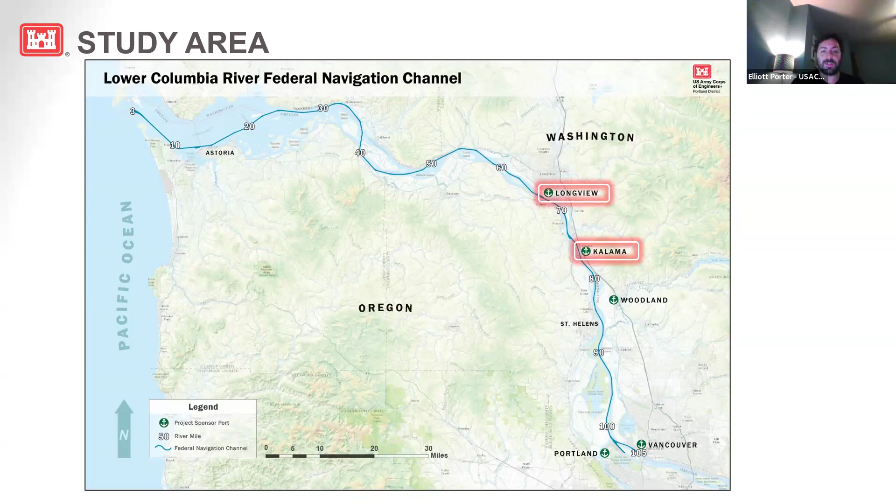So the area that we're looking at are at the ports of Kalama and Longview. It's about 2/3 of the way up to Portland and Vancouver on the Columbia River. These were areas that were considered in the previous channel deepening project, and we have been specifically asked to look at improvements or additional turning basins within this reach. Next slide.

So the reason why we look at this and the reason why the Columbia Snake River system is important is that it is a vital means of commerce for the region. It moves a lot of cargo, primarily exports of farm products out of the Columbia River and into the Pacific Rim. The lower Columbia River is #1 for U.S. wheat exports, #2 in soy and corn exports, and #3 globally in grain exports. It's also the #1 West Coast port for forest and mineral bulk exports.

In 1999, the Corps of Engineers was authorized to deepen the existing Columbia River Federal Navigation Channel from 40 to 43 feet. Since then, the ports have invested an additional $1 billion in infrastructure, which has led to increased utilization, the ability for larger ships and larger volumes of material to go out. And so we're taking a relook in terms of the system needs to meet not just our current but our future demand. Next slide.

So the current problems that we've identified within the study area is that the existing federal turning basins are overutilized. They're insufficient. The ships, since the channel deepening, have gotten larger. They're deeper drafting. And this has resulted in congestion, increased use of tugs, and tidal delays. We also see frequent shoaling and low water at the Port of Kalama. They currently maintain an area in front of the Temco grain terminal. In the late summer, coinciding with low water, we also see shoaling in that area, which results in decreased depth.

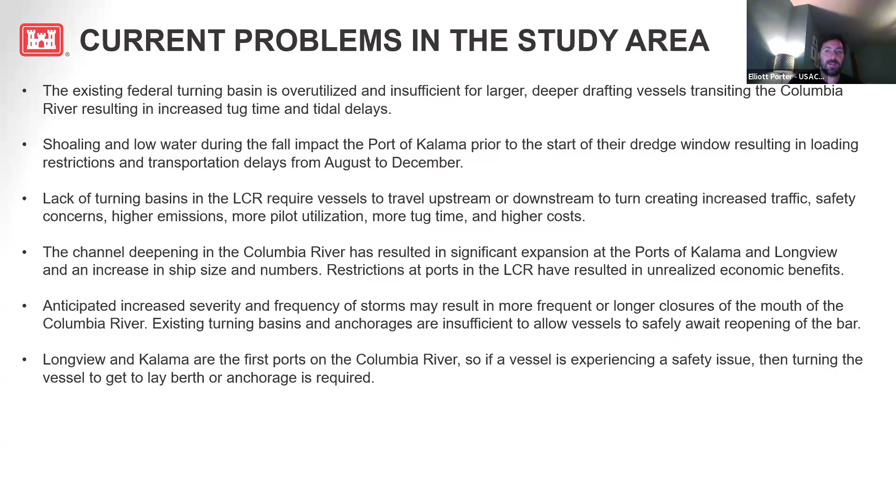So the objectives for this study are looking at ways to improve the utilization of our existing facilities to maximize capacity within the system. We're looking to improve the efficiency of vessel loading, reduce tidal restrictions, and maximize our transportation cost savings by getting vessels on and off the berth more quickly. As I mentioned before, where we see insufficient depth at these turning basins, or we see shoaling during periods of low water, it results in queuing and increased transit and turning times.

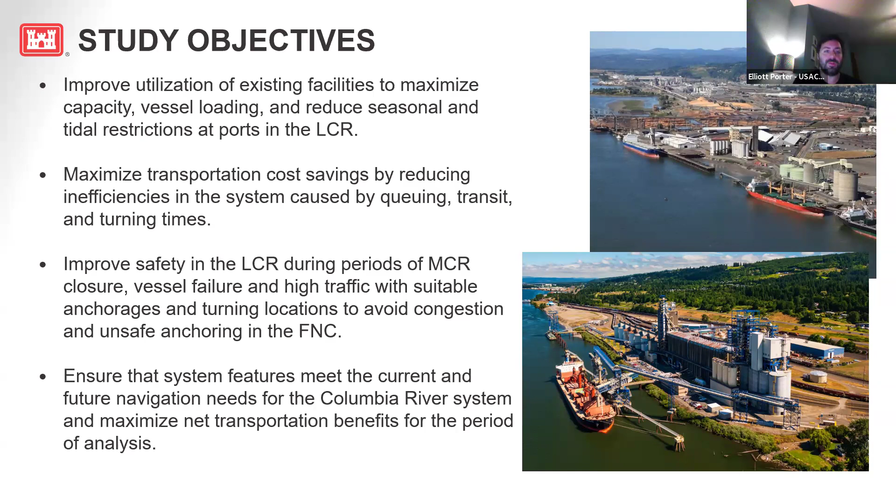Overall, we're looking for opportunities to improve safety in the lower Columbia River, but especially during periods of closure at the mouth when vessels cannot come in or go out of the system. And then we're looking not just at today and what today's needs are, but over a 50-year planning timeline to understand what the future needs of the system might be. Next slide.

So when we started this project, we looked at a whole range of issues, even more than what we're showing here, but these were the primary ones. What you're seeing in bold are the ones that we considered implementable and measures that would achieve our objectives. Based on the congressional authority that we got for this study, we're specifically focused on improvements or establishment of new and existing turning basins. And so any project or any recommendation that we looked at included consideration of modifications of the existing turning basin at Longview or establishment of a new turning basin at Lower Martin Bar, which is at the Port of Kalama. Additionally, we looked at adding stern anchor buoys, which are areas for vessels to anchor.

We looked specifically at fully laden vessels that require the full 43-foot draft so that we have additional areas to place them outside of the channel to decrease congestion and improve safety. And then we also looked at sediment catchments, which are overdredging areas that catch sediment before they begin to impact our navigation features. And so those were the four that we carried forward.

We looked at some other primarily maintenance reducing alternatives like pile dikes, perpendicular dikes, and maintenance in other areas of the river to reduce the volume of material that was impacting the turning basins. They were eliminated for various reasons, primarily because the cost associated with them was beyond the benefits that we could hope to achieve. Next slide.

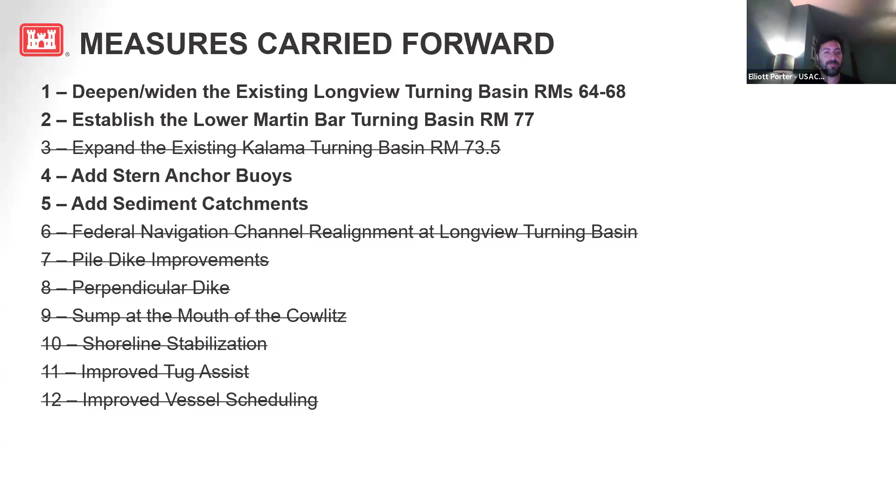So we took those handful of measures and we formed them into alternatives. We looked first at the Longview turning basin by itself, and this is improvements to an existing federal turning basin. Our second alternative was looking at establishing a new turning basin at Lower Martin Bar. We considered them individually to make sure that they were economically justified on their own, and then we combined them together and ensured that they were economically justified together.

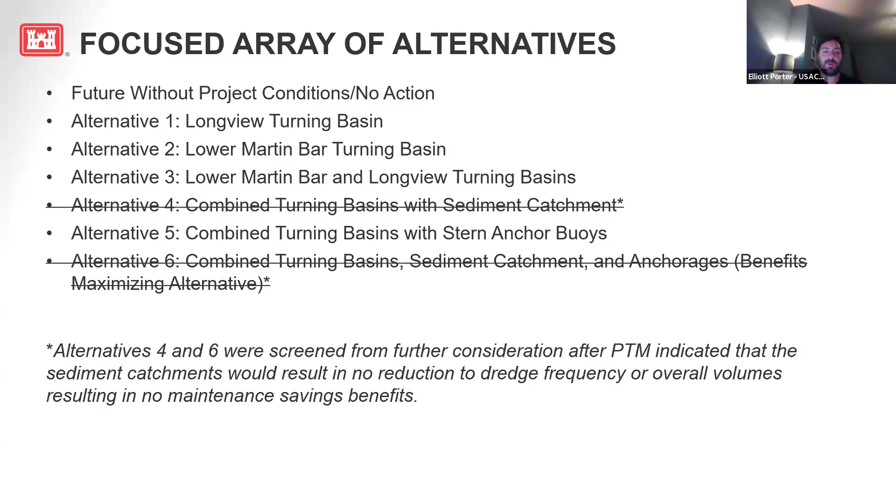And then finally, we looked at the combined turning basin with stern anchor buoys for additional places to anchor those vessels. We did have two additional alternatives that were eliminated upon further analysis. Both of them included the sediment catchment. The idea with the sediment catchment is that you overdredge an area and you reduce the frequency and/or the volume of material that needs to be dredged on an annual basis. During our analysis, we determined that it would not decrease the overall annual volumes or the frequency that we would need to dredge. So it was just additional cost without any additional benefit. Next slide.

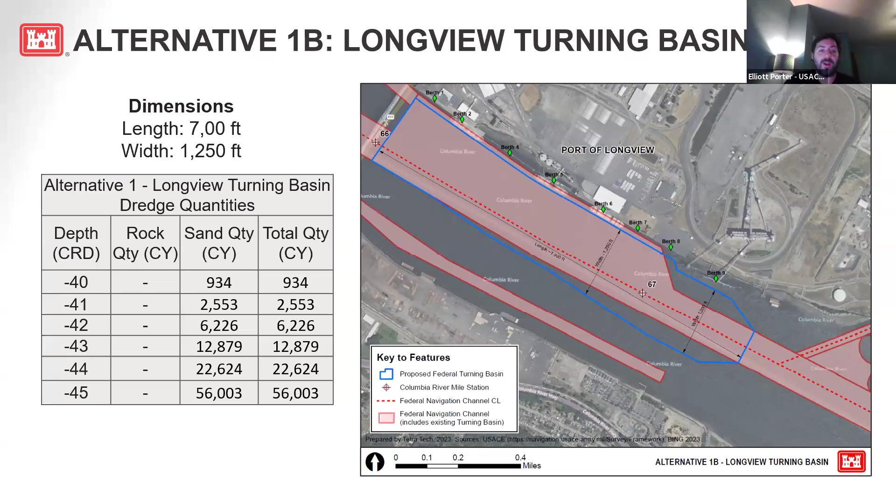And when you look in comparison to the previous slide, the dredge quantities do not increase significantly. As we move into the existing turning basin, a lot of that naturally exists deeper than the 40 feet that we're authorized to dredge to. And so what we see is very limited additional dredging required to expand that turning basin across the full footprint. Next slide.

So the next alternative is consideration of a new turning basin, a new federal turning basin at Lower Martin Bar.

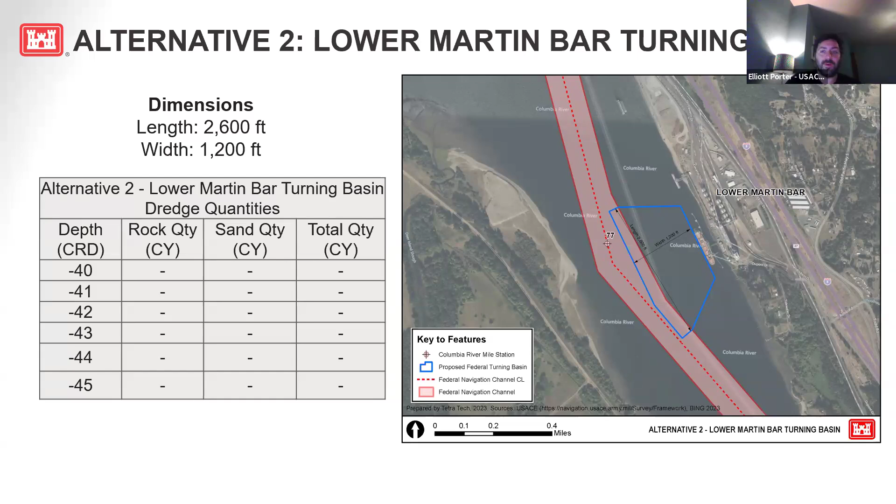So alternative 3 is looking at those combined turning basins. I'll just say that we selected the larger footprint based off of an economic comparison between the two of them. The way that we consider these is net economic development benefits. And so we look at our annual costs versus our annual benefits, and we seek to maximize the net benefits associated with our project.

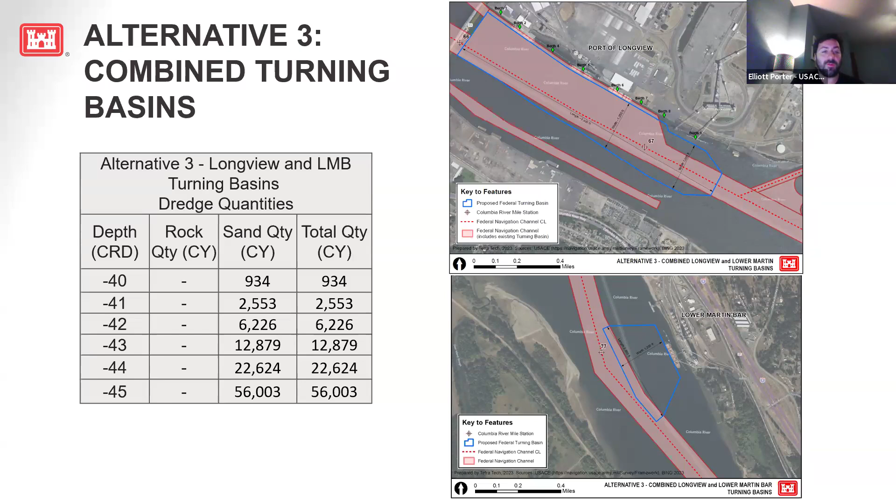So we looked at those two footprints. We made the determination that alternative 1B, the larger footprint for Longview, was the benefits maximizing of the two. And so that's what we carried forward into the rest of our alternatives for comparison. You can see that the sand quantities are the same as alternative 1B because it would just be additional dredging required at the Port of Longview turning basin to deepen that. Next slide.

So finally, we looked at alternative 5. This is the combined turning basins that we showed on the slide before. We also did an analysis to determine the most suitable locations to place stern anchor buoys. We considered a range of locations, and after our analysis, we determined that there were three that were economically justified.

The first one on the left-hand side map, that's just downstream from the Longview turning basin. You'll see that there's two boxes there. On the right-hand side is the anchorage and the placement of the stern anchor buoy. The narrower band is a realignment of the channel that we are considering in order to make transit under the bridge safer and to avoid kind of that turn. So ships will be able to more easily transit under the high point of the bridge and hopefully improve safety there.

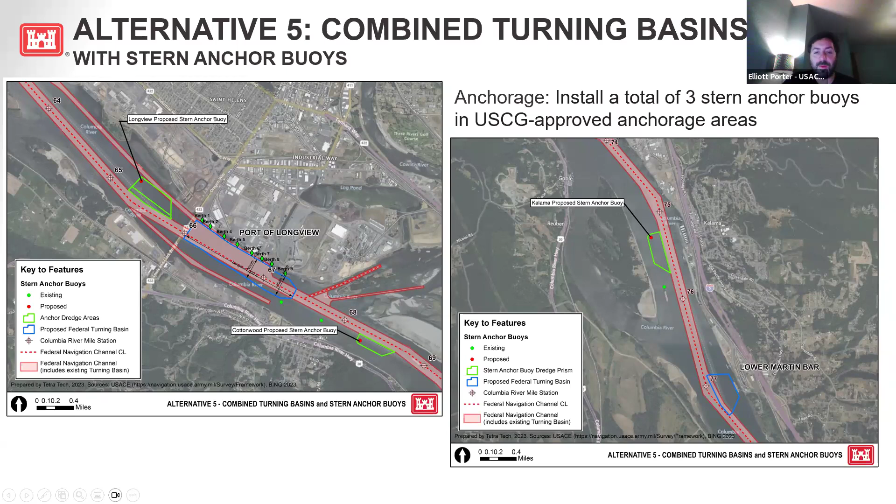We also identified two other locations for placement of stern anchor buoys on the right side of the map, across from Cottonwood Island and then further upstream near the Port of Kalama. You can see the proposed Lower Martin Bar turning basin a little bit further upstream from that. Next slide.

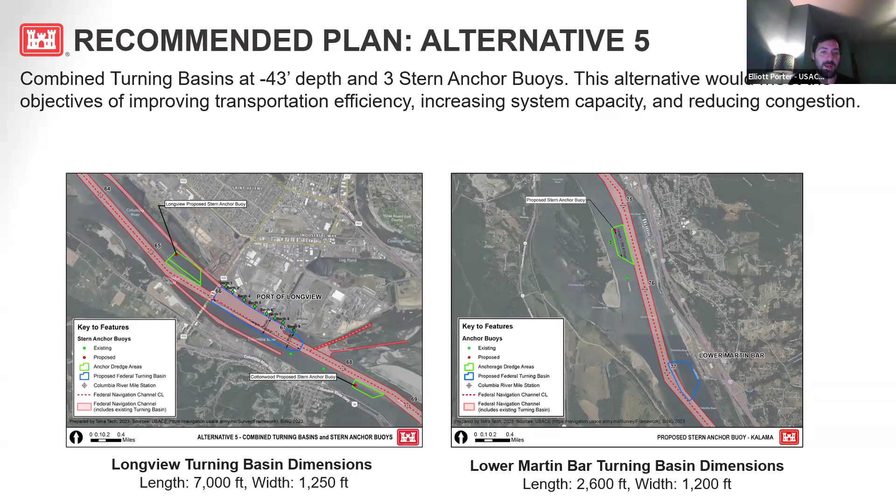So after analysis, our recommended plan is alternative 5 at a depth of 43 feet. So it makes sense that the turning basins maximize benefits at a depth similar to the Federal Navigation Channel that would allow both the ports of Longview and Kalama to load vessels to fully maximize utilization of that channel. Similarly, the stern anchor buoys were assessed at a depth of 43 feet in order to ensure that fully laden vessels could be anchored there. Next slide.

So when the Corps of Engineers analyzes a project, we look at our existing conditions, and we look at what would change if we did a project. So under existing condition, the Corps of Engineers takes no action, right? Things remain the same, and what would we expect to see? We would likely see increased congestion and traffic delays in the lower Columbia River. There is a finite amount of capacity, and the longer that those vessels stay idling at the berths is a decrease in terms of the number of vessels and the total throughput of those facilities.

We would see a continuation or a decrease in accessibility for deep draft vessels, and so vessels that need to load to 43 feet may not be able to go to ports of Kalama or Longview if the water depth is not there. We would potentially see a decrease in imports and exports at both the Port of Longview and the Port of Kalama because of this. And then having fewer turning basins within the system for deep draft vessels means that vessels are going to have to transit further upstream or downstream to turn in an emergency case or just to transit out of the system.

The benefits associated with the with-project condition: it's an overall decrease in congestion and traffic delays within the system as a whole. Increased accessibility for these vessels that require the full 43-foot draft, the potential for increased imports and exports at the Port of Longview and the Port of Kalama. We have vessels that are queuing for shorter periods of time. We have vessels that need to wait on the berth for a shorter period of time, allowing loading of more vessels in a year.

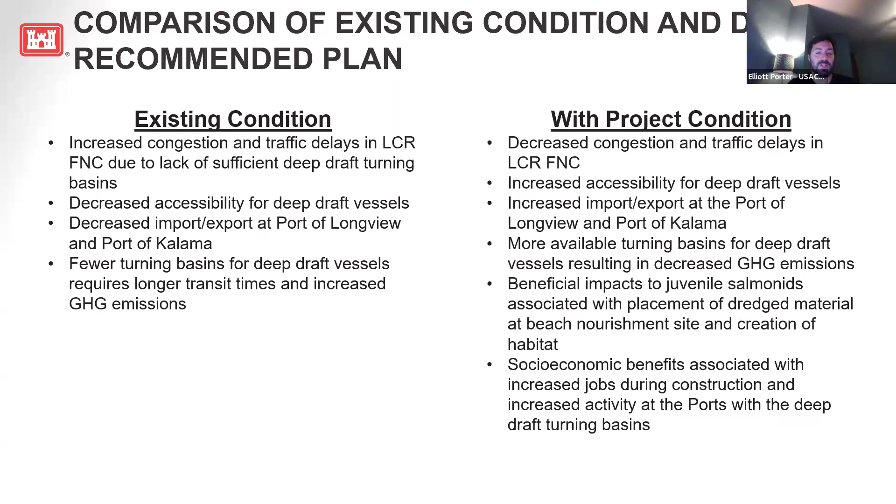And so we are proposing the placement of our dredge material at a beach nourishment site with the objective of creating habitat that would benefit juvenile salmonids, and then all of the associated socioeconomic benefits with increased jobs during construction and increased activities at the port. Next slide.

So there are some environmental consequences that have been identified as part of the recommended plan. It is important to state that we did not identify any significant impacts that would have long-term negative consequences to the Columbia River. The majority of impacts that are identified and are outlined in the environmental assessment are short-term during construction or minor long-term to moderate adverse impacts associated with changes to the hydraulics of the river system.

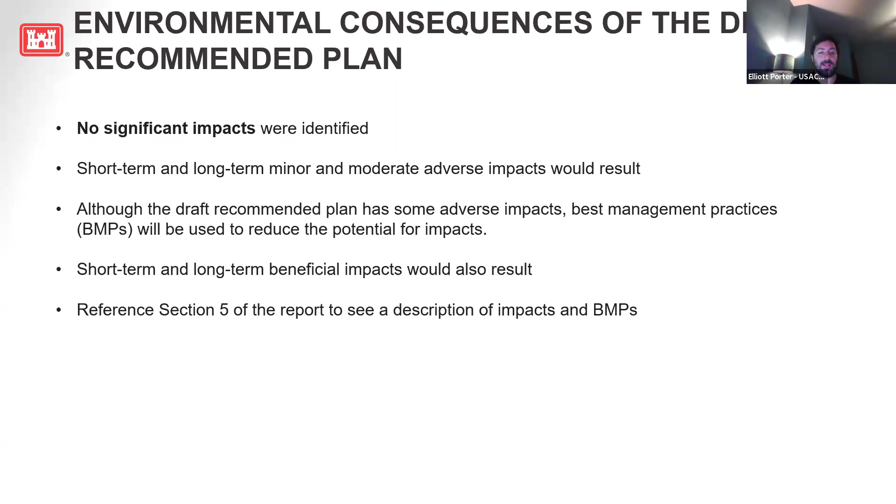And so although we've identified some adverse impacts, the Corps of Engineers is going to implement best management practices that are recommended by the resource agencies in order to further reduce those impacts. And so we would also see both short and long-term beneficial impacts from an environmental perspective in addition to the economic side. Section 5 of the report is the majority of the environmental assessment, and so on a resource-by-resource basis, that is outlined in the draft report that's posted online. Next slide.

So the study timeline and opportunities for public involvement. Right now, July of this year, the draft feasibility report has been released for public review. As I mentioned earlier, that's a 30-day period. We're about halfway through it. That period closes on August 3. And so there are multiple ways to provide comments over the next 2 weeks, and we encourage anyone who has any concerns or support or feedback on the project to provide that to us.